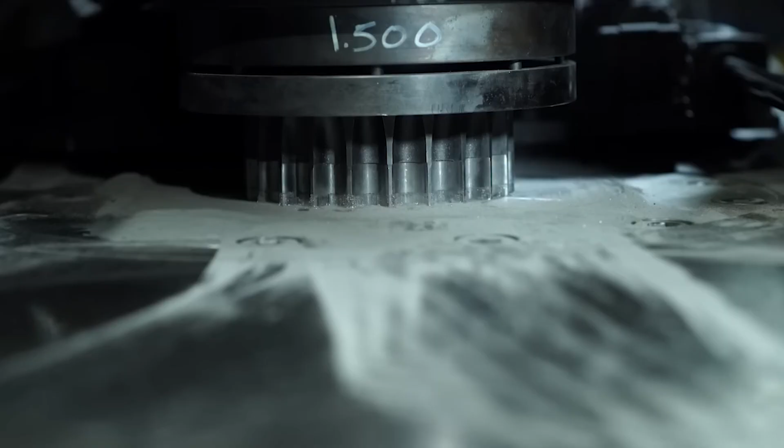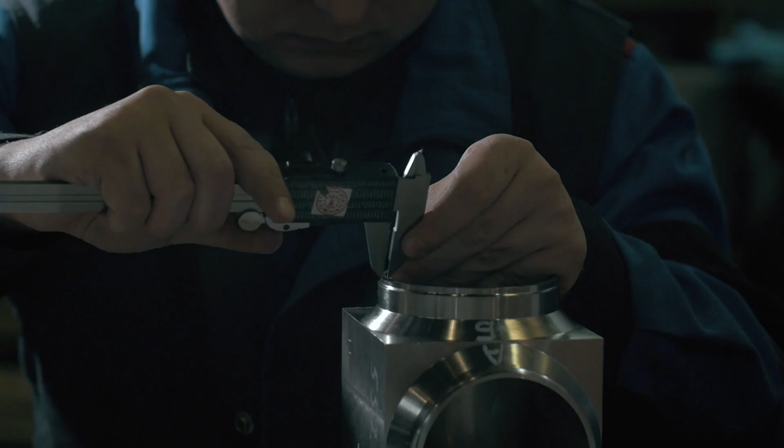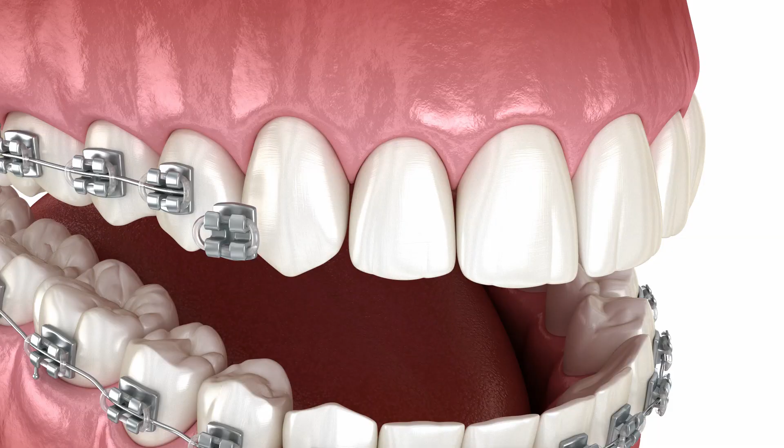However, powder metallurgy isn't a gamble. PM is an advanced manufacturing technology that relies on data, the understanding of material properties, and precise engineering that supports design excellence. Design due diligence reduces risk and strengthens a calculated gain. Through the sharing of demonstrated success stories of groundbreaking applications, providing knowledge that is invaluable for the evolving technology, powder metallurgy components are recognized as the solution for many market segments.

Ladies and gentlemen, we proudly present the winners of the 2023 Powder Metallurgy Design Excellence Awards competition, sponsored by the Metal Powder Industries Federation. Let's start with the awards of distinction.

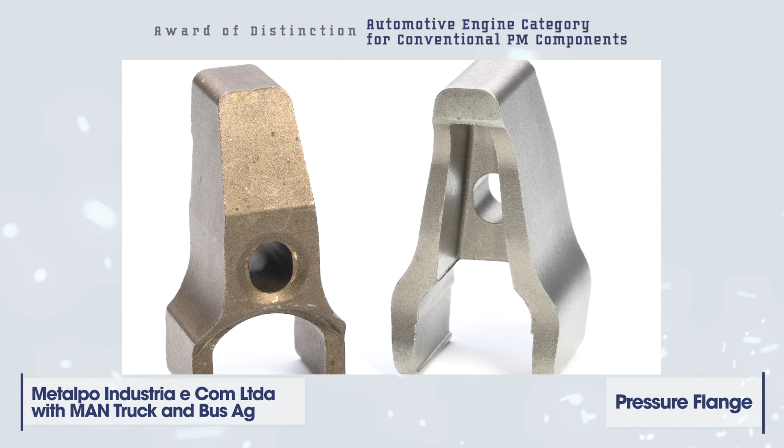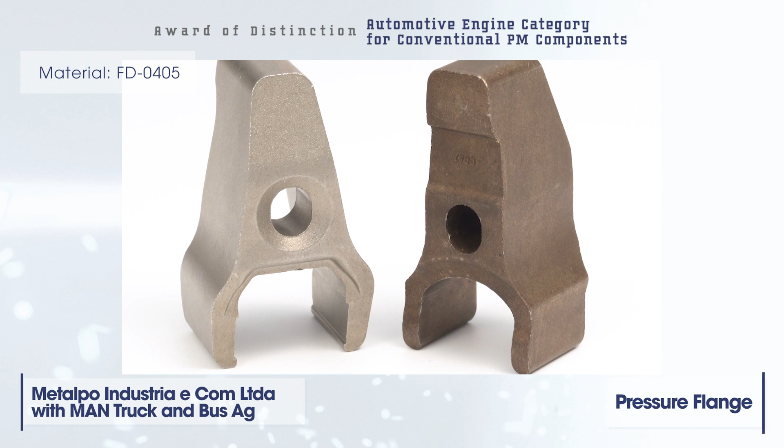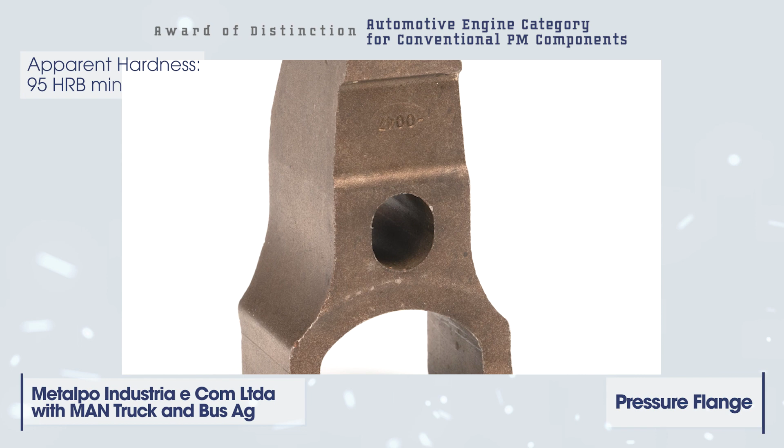Metalpo Industria e Com Ltda and customer MAN Truck & Bus AG received an award of distinction in the automotive engine category for conventional PM components for a pressure flange. Initially, this pressure flange, used to secure fuel injectors in truck engines, was a carbonitrided PM component that required 6 processing steps. After redesign, the sinter-hardened diffusion alloyed steel component requires only 4 processing steps, has reduced mass, and increased the breaking load from 65 kilonewtons to 90 kilonewtons. Eliminating the carbonitriding and subsequent tumbling processes has reduced energy consumption, and greenhouse gas emissions have been reduced by more than 1 ton annually.

Hangzhou Sino-Mim Technology Company Limited received an award of distinction in the automotive engine category for MIM components for a turbocharger nozzle ring assembly. The nozzle ring assembly components require good strength, oxidation, and corrosion resistance while operating in a high-temperature environment of 900 to 1000 degrees Celsius. To meet the material requirements, an austenitic stainless steel was selected. Previously, the parts were made using a precision casting process that had lower production efficiency, poor dimensional accuracy, poor surface finish, and required more secondary machining operations.

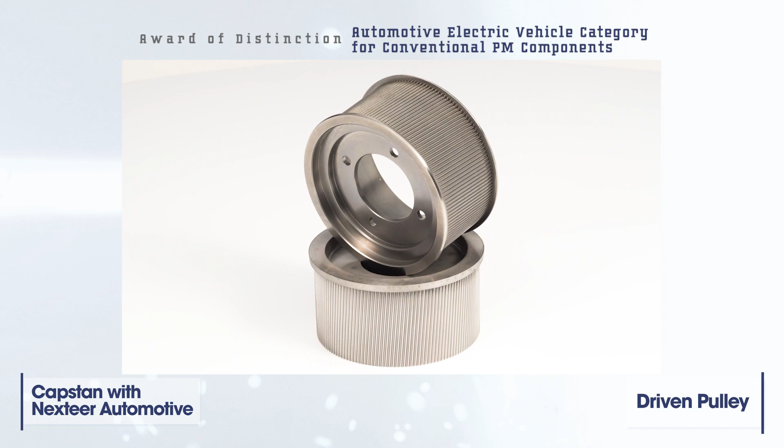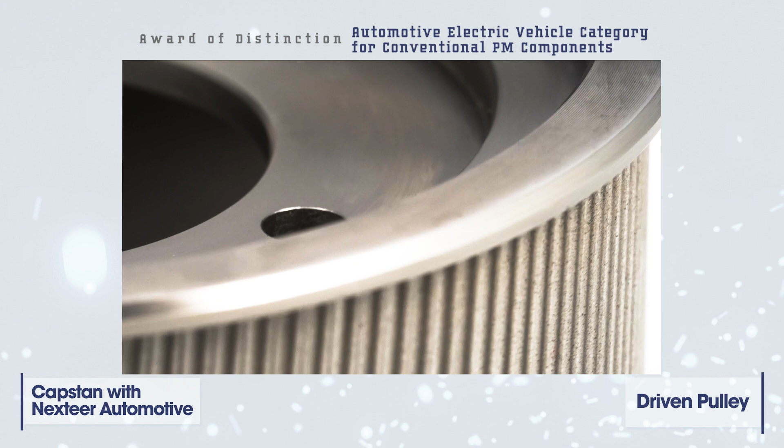Capstan and customer Nexteer Automotive received an award of distinction in the automotive electric vehicle category for conventional PM components for a driven pulley. This driven pulley is bolted to the shaft controlling the electric power steering of an electric autonomous vehicle. The pulley is compacted with an integral top flange and, after drilling, a stamped flange is welded onto the bottom of the pulley. The pulley is made using FC0208 compacted to a density of 6.9 grams per cubic centimeter. Machining the pulley would lead to an estimated 60% scrap, far more material on the floor than in the pulley.

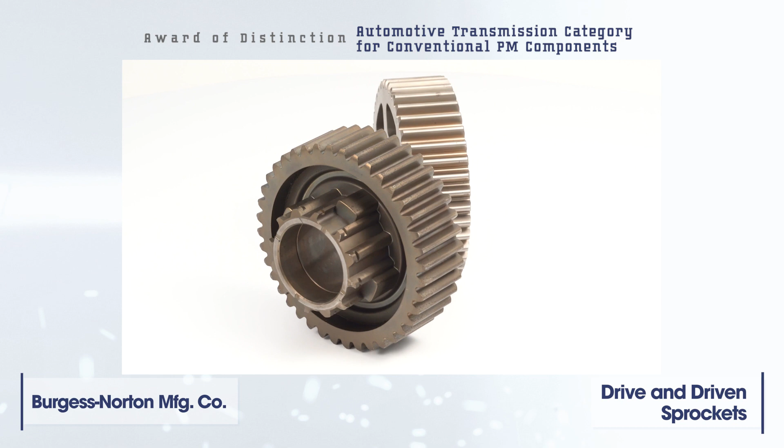Burgess Norton Manufacturing Company received an award of distinction in the automotive transmission category for conventional PM components for drive and driven sprockets. Used in a pickup truck with a hybrid drivetrain that incorporates battery propulsion and traditional internal combustion engine technology, the sprockets are used when the transfer case is engaged using a chain drive. Both parts require a minimum density of 7.0 grams per cubic centimeter in the sprocket teeth. PM sprockets work well in high-density applications where part strength and resistance to wear is critical. Repeatability of tight tolerances allows significant vibration reduction during operation.

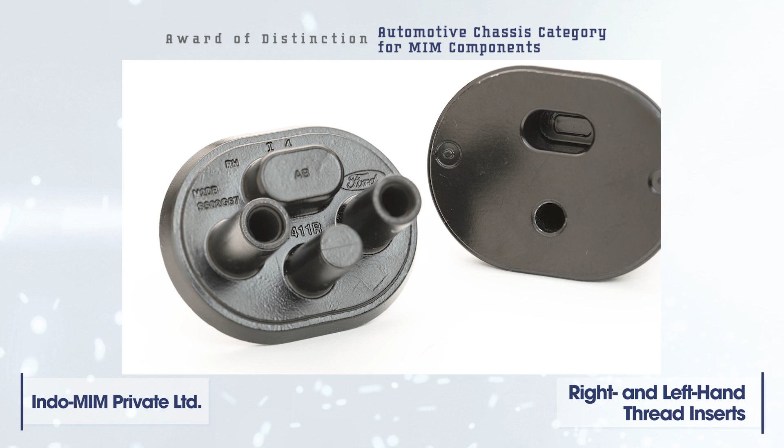Indo-MIM Private Limited received an award of distinction in the automotive chassis category for MIM components for right and left-hand thread inserts. These right and left-hand thread inserts are used in high-end automobile sunroof systems to clamp and hinge different components of the system. MIM 4605, quenched and tempered, was used to make the parts that have an apparent hardness of 37 to 40 HRC and a density of 7.0 grams per cubic centimeter. Powder coating and electroplating enable the parts to satisfy a 2,000-hour salt spray test. The parts are made without secondary thread tapping operations.

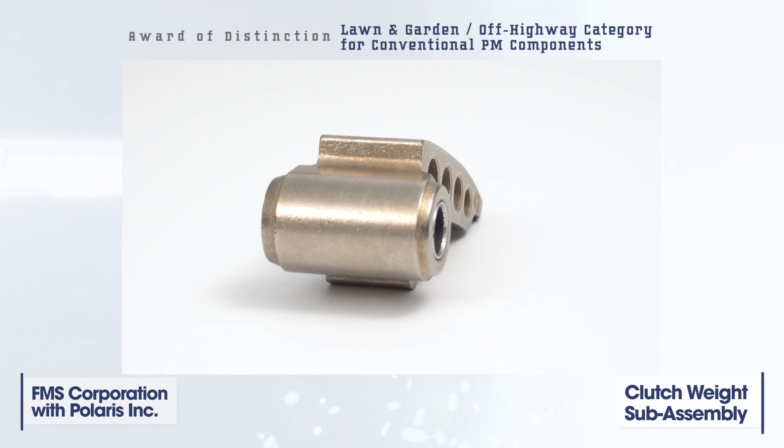FMS Corporation and customer Polaris Incorporated received an award of distinction in the lawn and garden off-highway category for conventional PM component for a clutch weight subassembly. Used in an all-terrain vehicle, this clutch weight subassembly is a speed-sensing component of the primary clutch in a continuously variable transmission. As the engine RPM increases, the 3 flyweights swing out against rollers in the spider tower through centrifugal motion. PM was selected to meet the customer's needs to have a component that could be retrofitted into existing clutches. Only a reaming operation was required for one hole to aid bearing assembly.

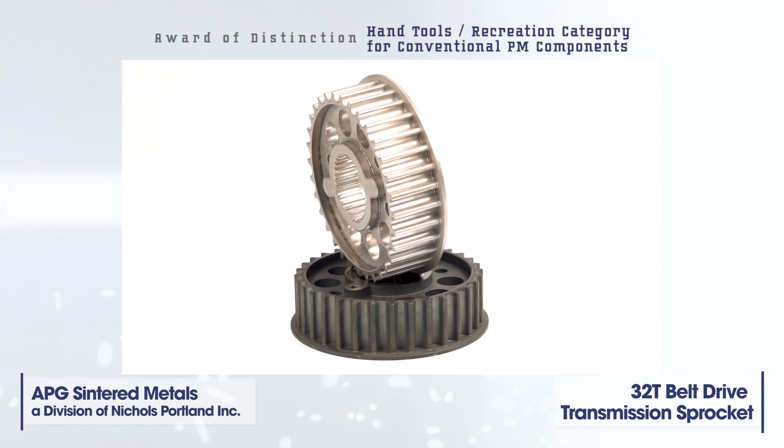APG Sintered Metals, a division of Nichols Portland Incorporated, received an award of distinction in the hand tools recreation category for conventional PM components for a 32-teeth belt drive transmission sprocket. This 32-teeth belt drive transmission sprocket, used on several motorcycle platforms, requires moderate strength, but more importantly, wear and corrosion resistance as it is exposed to the elements. Steam treatment, a cost-effective solution, increased surface hardness and sealed off porosity to prevent wear and corrosion. The customer selected PM as the solution because the lightening holes reduce the part mass by 18% and the part's geometry and tolerancing take full advantage of the benefits the PM process has to offer.

Indo-MIM Private Limited received an award of distinction in the hand tools recreation category for MIM components for a clamp body. Used in a subassembly for hand power tools, this clamp body redesigned for MIM outperformed the prior machined component in material utilization, wear resistance, dimensional accuracy, and repeatability. MIM provided freedom of design for the customer, making their product more successful, efficient, and environmentally friendly by eliminating toxic cutting fluids, and provided a cost saving of 60% compared with the machined part that was replaced.

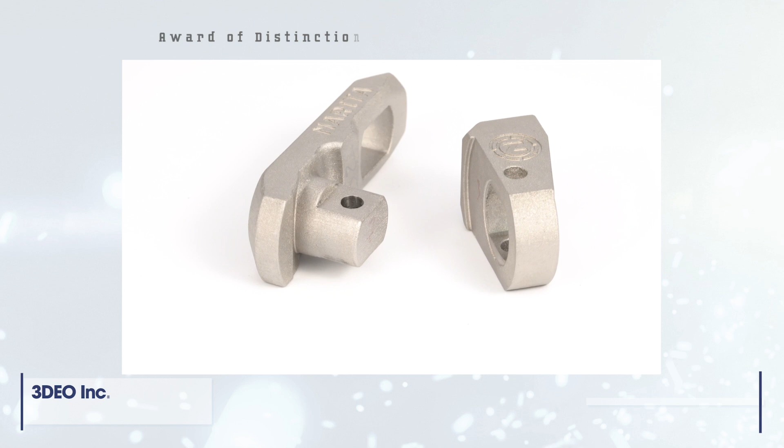3DEO Incorporated and customer Narita Manufacturing received an award of distinction in the hardware appliances category for metal AM components for a fastener assembly. This fastener assembly attaches the intercar baffles to retaining frames on bullet trains. It replaced 10 individual components and 4 rivets, eliminating riveting, welding, and grinding from the production process. The fastener must withstand a substantial transient bending moment in operation, be able to be rotated with a tool but tamper-resistant to passengers, and resist unintended rotation due to train car motion and vibration. The one-piece design simplifies the manufacturing process, reduces supply chain part counts, and is easier to use in service.

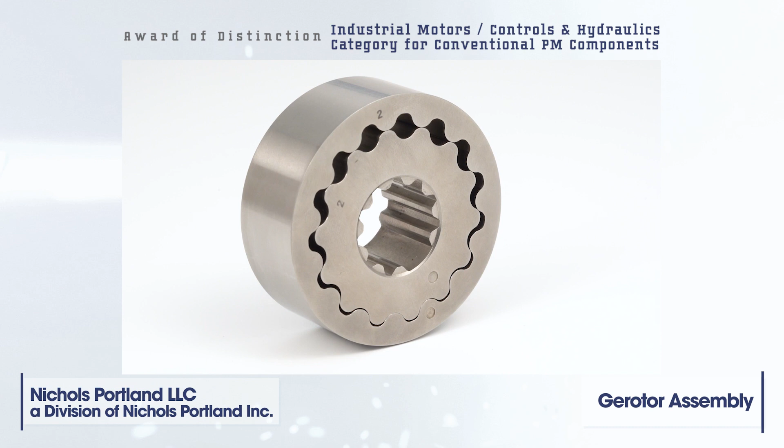Nichols Portland LLC, a division of Nichols Portland Incorporated, received an award of distinction in the industrial motors, controls, and hydraulics category for conventional PM components for a gerotor assembly. Used in diesel charge pumps for high-pressure direct injection systems in large construction and stationary power systems that operate in harsh environments for years, this gerotor assembly requires robust material properties to minimize sliding and fretting wear from low lubricity diesel fuel. The parts are double-pressed, double-sintered, followed by sizing, neutral hardening, sub-zero processing, and tempering to meet these exceptional requirements.

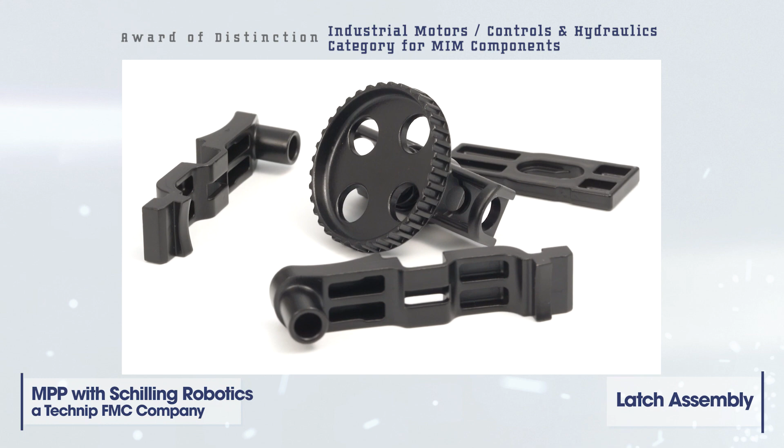MPP and customer Schilling Robotics, a TechnipFMC company, received an award of distinction in the industrial motors, controls, and hydraulics category for MIM components for a latch assembly. This latch assembly is used in the tightening mechanism for a specialized electrical and communications cable. Used in a deep ocean environment, the cables are the bridge between electric actuators, sensors, and cameras for the robot's communication network and power. Plastic latch assemblies didn't meet the critical requirements, but a highly corrosion-resistant coated MIM stainless steel part met all requirements and had a material utilization that was 40% better than its machined counterpart.

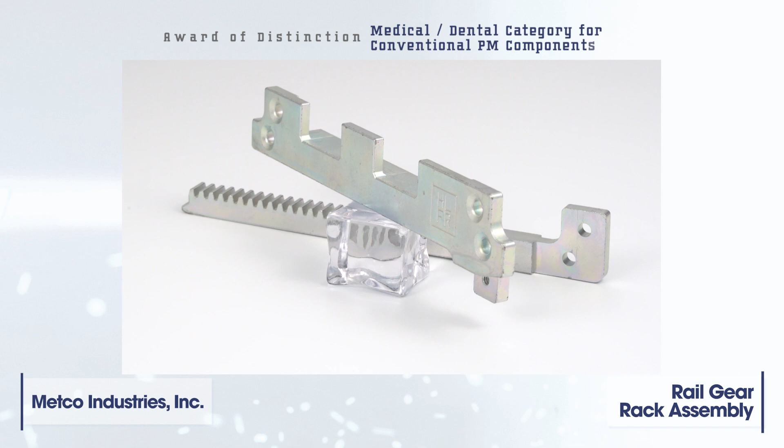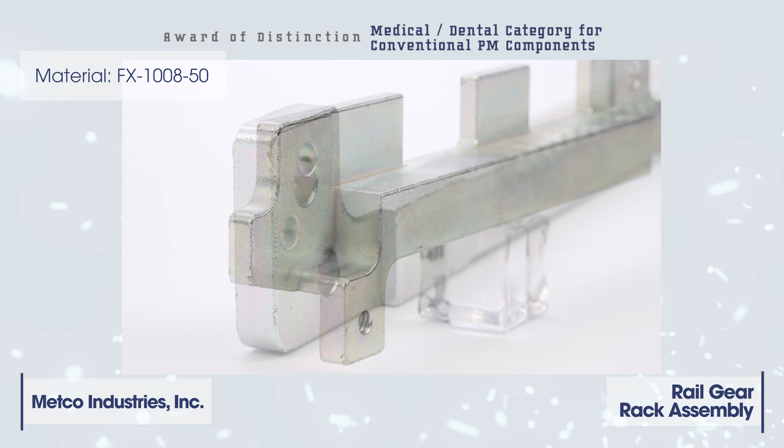Metco Industries Incorporated received an award of distinction in the medical dental category for conventional PM components for a rail gear rack assembly. Used for the adjustment of higher weight limit capability hospital beds, this rail gear rack assembly consists of 2 identical PM parts that are riveted to each end of a second PM part. The parts are copper infiltrated during the sintering operation and deburred in the as-sintered state. The infiltration process improved the strength and toughness of the parts, and combined with zinc plating, the parts met the requirements for product sterilization in service.

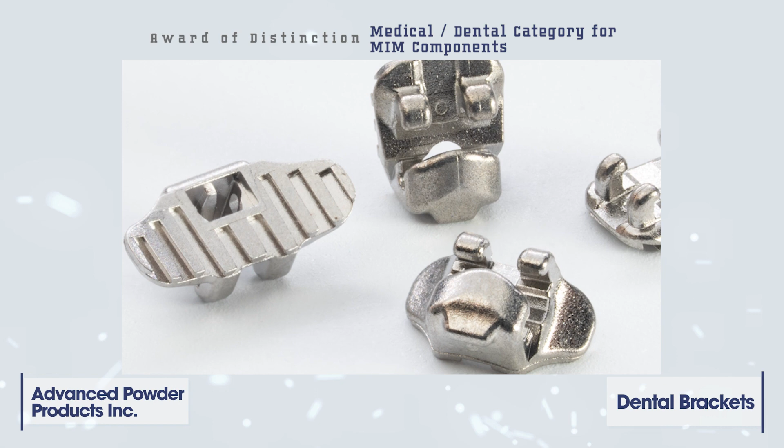Advanced Powder Products Incorporated received an award of distinction in the medical dental category for MIM components for dental brackets. These lower anterior, upper central, bicuspid, and molar dental brackets are part of a newly introduced and revolutionary orthodontic correction procedure. Originally a complex two-piece design featuring two common bracket bodies that were laser welded to 4-pad geometries was difficult for MIM. The solution was found in a single-part design that favored MIM and improved speed to market by reducing costly testing of the part weldability.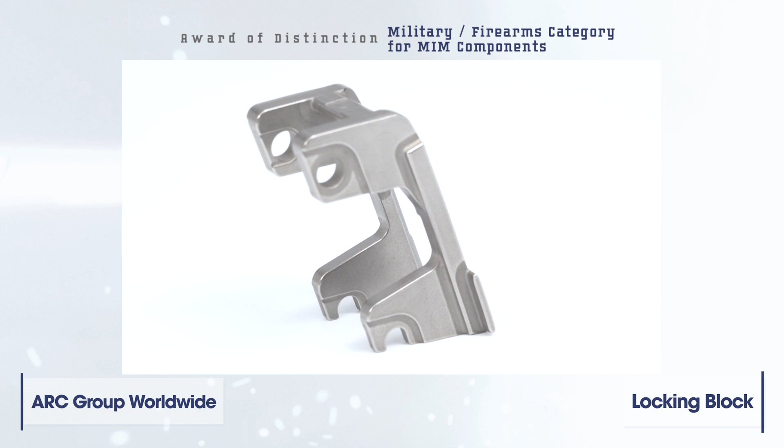ARC Group Worldwide received an award of distinction in the military firearms category for MIM components for a locking block. Housed within the lower receiver of a 9mm semi-automatic pistol, this locking block secures and stabilizes movement of the slide and barrel within a polymer frame. Made from S7 tool steel to a minimum density of 7.5 grams per cubic centimeter, the parts are heat-treated and salt bath nitrided. MIM processing was selected for making this part because of the complexity, annual usage, and MIM's existing dominance in the firearms industry.

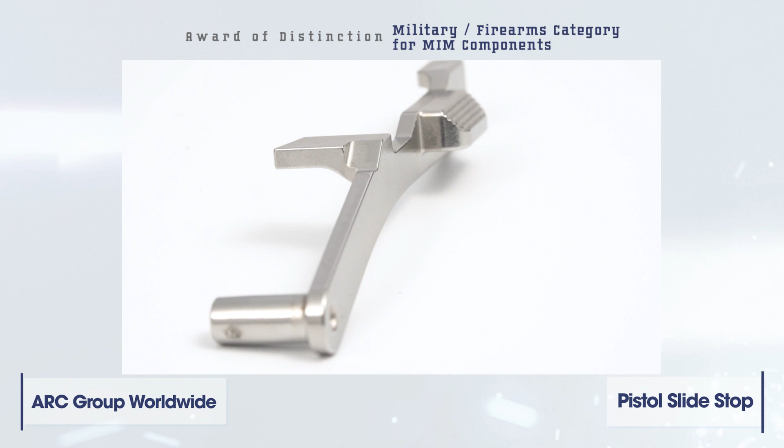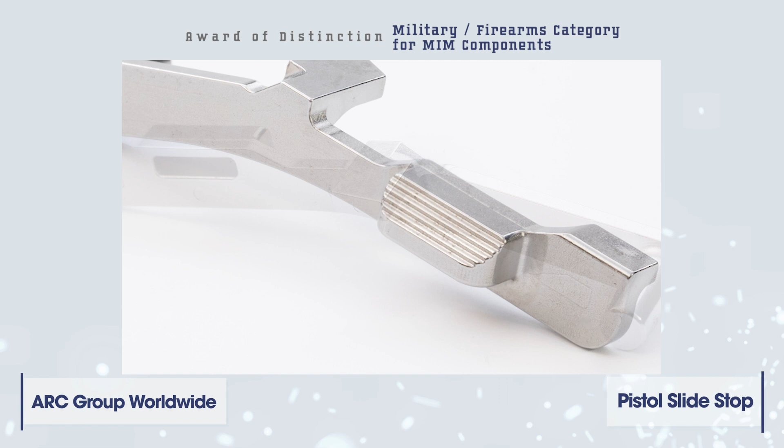ARC Group Worldwide received an award of distinction in the military firearms category for MIM components for a pistol slide stop. This slide stop is used on a pistol to hold the slide open when the magazine is empty or the user needs to open the action. Prior to MIM processing, this part was assembled from multiple pieces or machined. The MIM process provides a single, net-shaped part that does not require any machining. The parts are made in a zero-discharge facility.

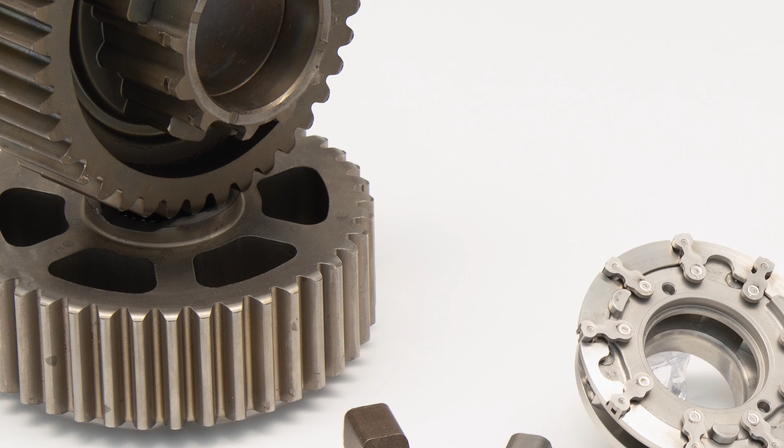Ladies and gentlemen, these are the winners of the Awards of Distinction in the 2023 PM Design Excellence Awards competition. Please join us in acknowledging their achievements as company representatives accept their awards.